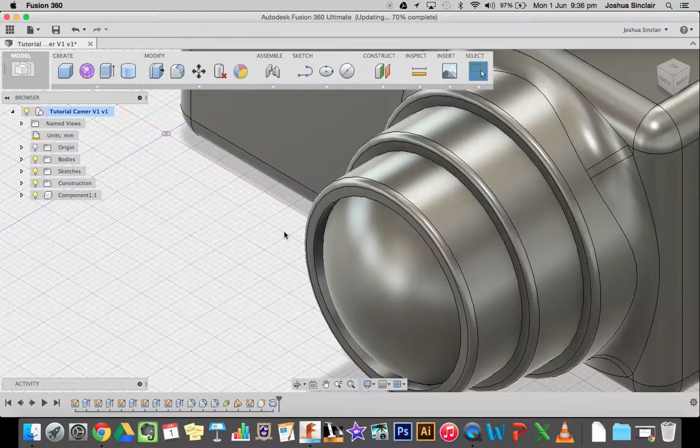Now we've got our curved lens here, we're going to look at the back of the camera. We need to add some features, mode buttons, LCD screens, that will help make it more like a digital camera. To do that, I'm going to select the surface on the back, and then go into sketch mode.

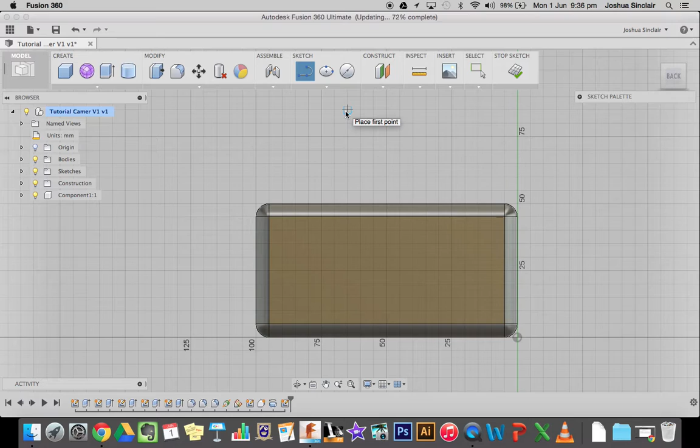What we want to do here is create a square rectangle that we can extrude in on itself, removing the material, and that'll give us space to put an LCD screen. So if I go rectangle, 2 point, I'm going to go from that corner right over to the 70mm line. If it's not letting me snap on, you go tab, 70, enter, and then select it.

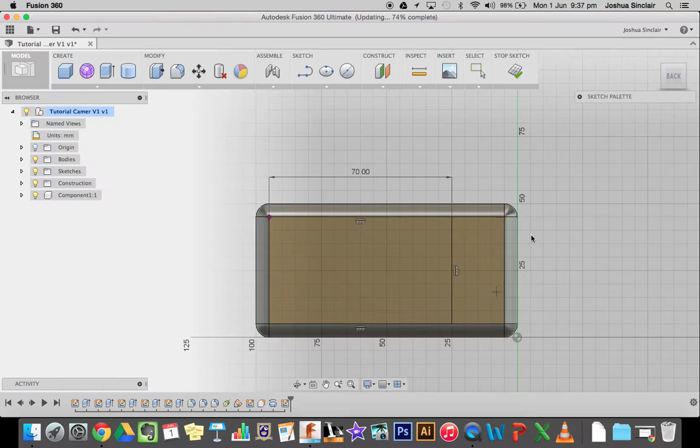What we want to do now is stop the sketch, hit the shape that we've just done, extrude it, but instead of extruding it out, we're going to extrude it in on itself, and we're only going to extrude a distance of 1mm.

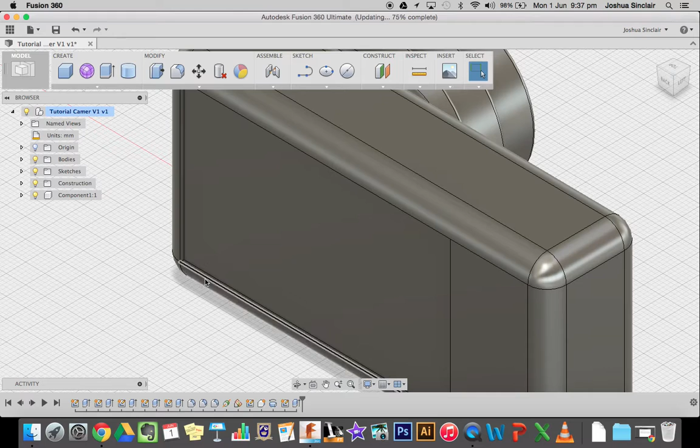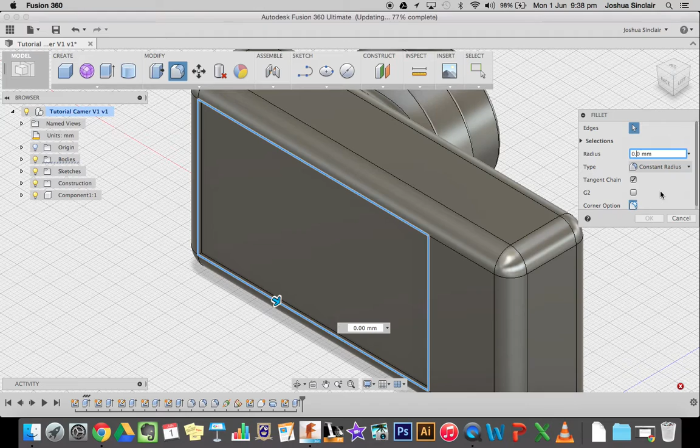Okay, what we want to do now is, again, remove the harshness of those sharp edges. So we'll grab our fillet tool and go around each of these outside edges, and we're going to put a fillet on there of 1mm. If it won't do that, let's go 0.5, and hit OK.

So now if we rotate right around, we've got a nice soft edge on there.

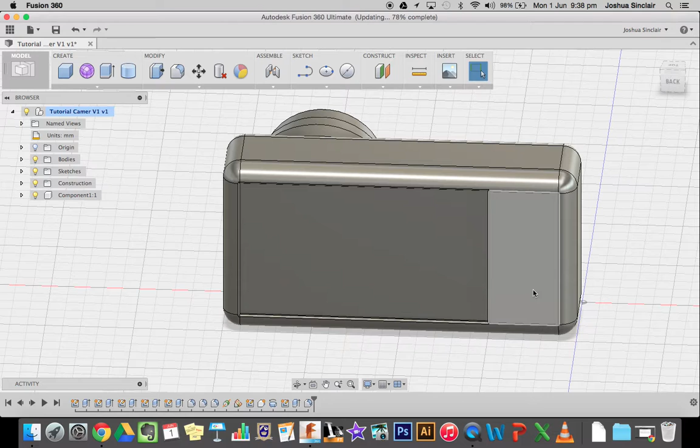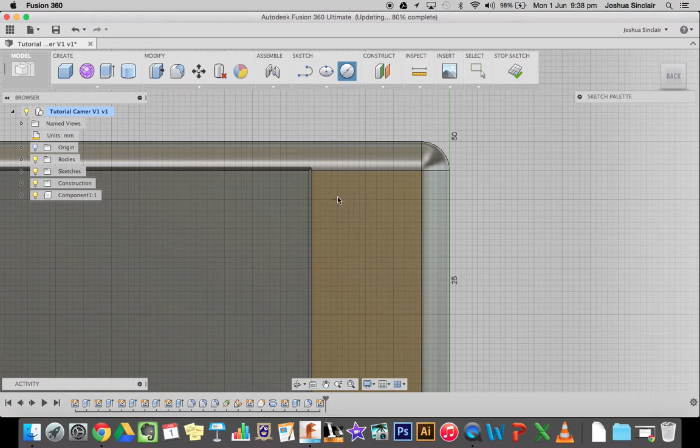Next thing we want to do is put some buttons along the side here. So again, we'll go into sketch mode, and this time we're going to use the circles, so the circle tool. Again, it's on the drop down if need be.

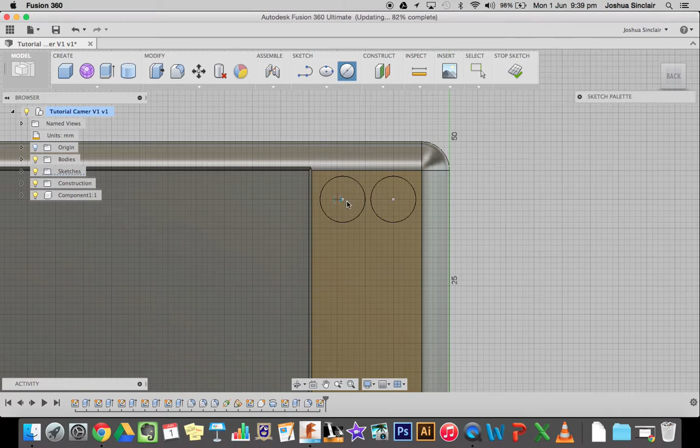So to get it nice and neat, we can just do a couple of 8mm buttons, spaced nice and neat inside there. If you find that, as you can see here, it's not quite even in the spacing, if you go sketch and trim, we can delete it and give it another shot. So if I go from here, 8mm, and then we have not exact spacing but good enough. We're happy with that, stop the sketch, and now that allows us—I'll just go back to the rear view.

That gives us two sketches that we can extrude. Now you can do both at the same time by holding down the shift key and selecting your two shapes and extruding that out.

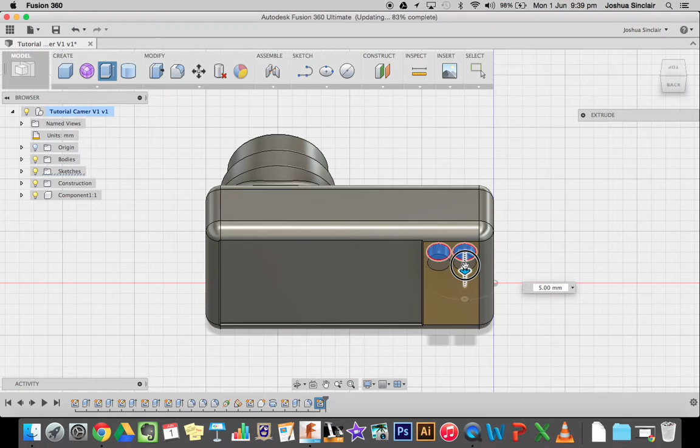So again, I can extrude that out. 5's probably a bit too much, I'm going to go 2, and then hit enter. So now we've got some buttons on the back here.

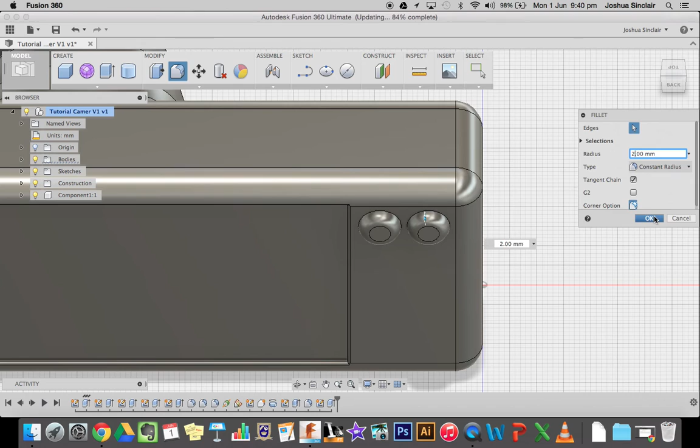Again, we want to fillet the edges, just so, like all buttons, they're going to be nice and round. So that's one way to do the buttons.